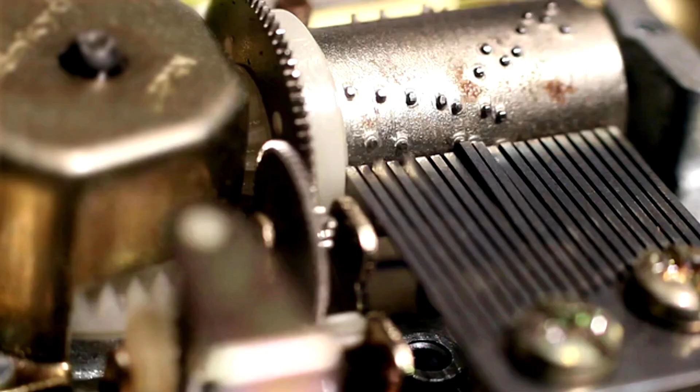Nowadays we are surrounded by lots of mechanical devices, and humans are rapidly enhancing these devices. Yet there is a question in our minds where this all began. This all began around the 12th century. The birth of a genius boy named Badi al-Zaman Abu al-Izz Ismail ibn al-Razzaz al-Jazari, in the house of a

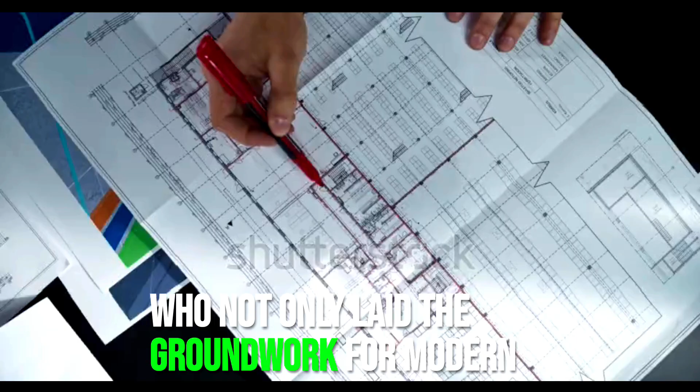humble craftsman. One of the most fascinating cases is that of the 13th century inventor-artist Ismail Al Jazari, who not only laid the groundwork for modern engineering, hydraulics, and robotics, but recorded his designs in a manner that would excite any enthusiast of Leonardo da Vinci's notebooks. In fact, it is often claimed they may have inspired Leonardo himself.

Badi al-Zaman Abu al-Izz Ismail ibn al-Razzaz al-Jazari was born in the area of Upper Mesopotamia in 1136. Sources state his exact location is unknown, but they speculate he could have been born in Jazirat ibn Umar, where he got the name Jazari from, or al-Jazira, which was used to denote Upper Mesopotamia. The only biographical information known about him is contained in his book of knowledge of ingenious mechanical devices.

Like his father before him, he served as chief engineer at the Artuklu Palace, the residence of the Mardin branch of the Artuqids, which ruled across Upper Mesopotamia as vassals of the Zengid dynasty of Mosul, and later of Ayyubid general Saladin. Little is known about his ethnic background, so he has been variously described as Arab, Kurdish, or Persian.

Al-Jazari was part of a tradition of artisans, and was thus more a practical engineer than an inventor, who appears to have been more interested in the craftsmanship necessary to construct the devices than in the technology which lay behind them, and his machines were usually assembled by trial and error rather than by theoretical calculation.

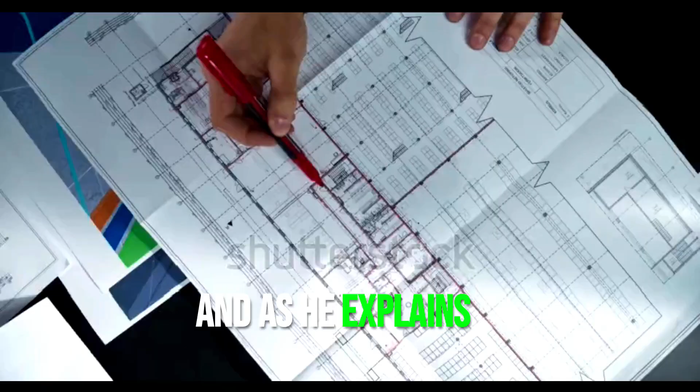His book of knowledge of ingenious mechanical devices appears to have been quite popular, as it appears in a large number of manuscript copies. And as he explains repeatedly, he only describes devices he has built himself. According to Mayer, the book's style resembles that of a modern do-it-yourself book.

Al-Jazari's masterpiece, The Book of Knowledge of Ingenious Mechanical Devices, 1206, contains detailed descriptions and illustrations of 50 mechanical devices. This work would influence engineering for centuries to come. Key features include precise technical drawings, step-by-step assembly instructions, practical applications, theoretical principles, automated control systems.

He created the first programmable humanoid robots, developed automated music-playing machines, designed sequential automation systems, water clocks and timekeeping, invented the elephant clock, combining Indian, Greek, Arabic, and Chinese engineering traditions, created water clocks with automated humanoid figures, developed mechanisms

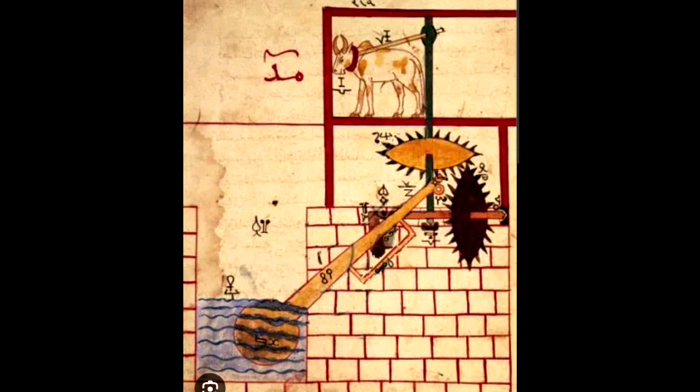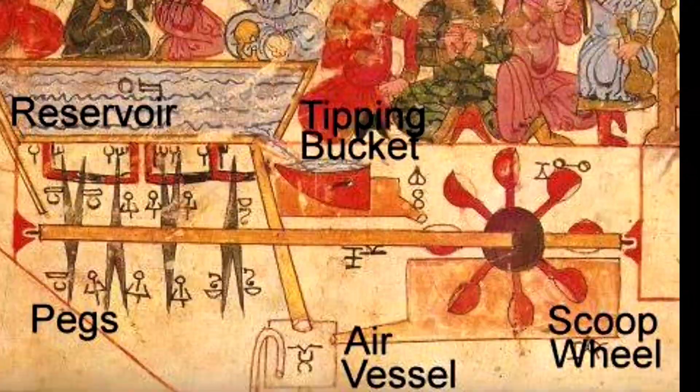for precise time measurement, designed advanced water-raising machines, created automatic fountains, invented mechanisms for controlling water flow, mechanical automata, designed automated peacocks that served drinks, created automated hand-washing devices, developed musical automata. Al-Jazari introduced several fundamental mechanical concepts.

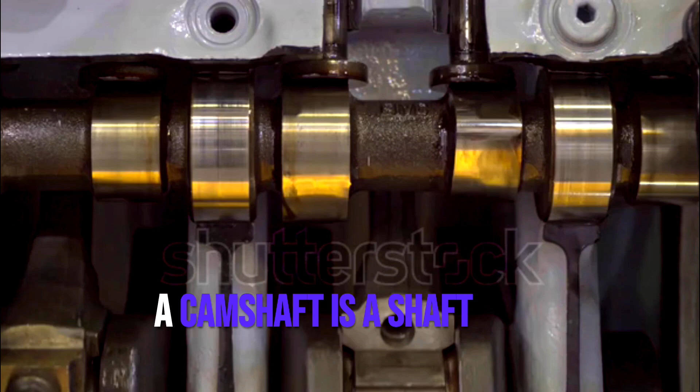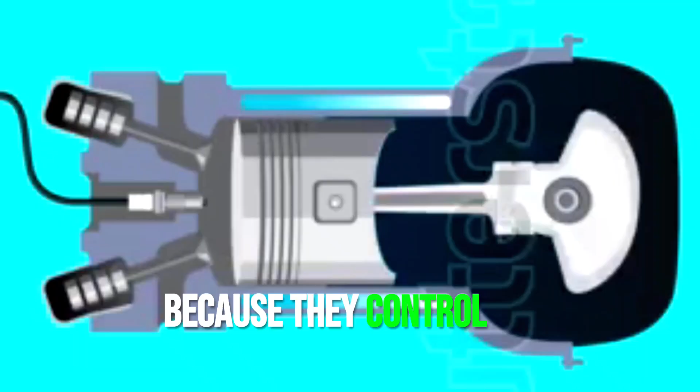1. Al-Jazari used camshafts in his automata, water clocks, and water-raising machines. Ismail Al Jazari described the camshaft in his 1206 book of Knowledge of Ingenious Mechanical Devices. A camshaft is a shaft with cams attached to it that controls the opening and closing of valves in an engine. Camshafts are critical to the operation of an engine because they control the amount of air-fuel mixture that enters the chamber and the exhaust gases that exit the chamber.

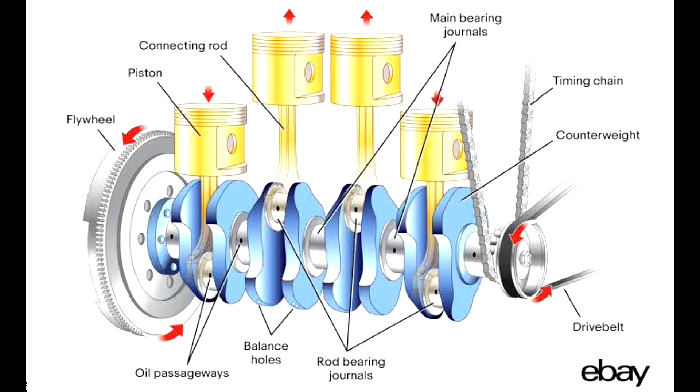Camshafts work in conjunction with the crankshaft, which moves the pistons. The shape of the cam and the speed of rotation control the rate at which the valves open and close. This is known as variable valve timing. 2. Crankshaft. Yes, Ismail Al Jazari invented the crankshaft in 1206. A crankshaft is a rotating shaft in an engine that converts the piston's up and down motion into rotational motion. This motion is necessary to turn the wheels and make the vehicle move.

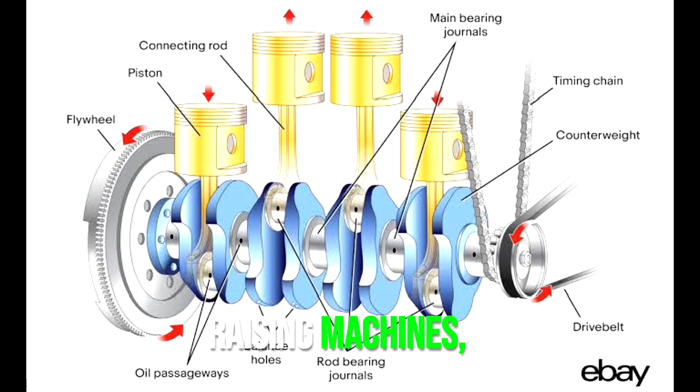Al-Jazari used the crankshaft in his water-raising machines, which incorporated a crank-connecting rod mechanism. His suction piston pump could lift 6 meters of water, which was more advanced than European suction pumps of the 15th century. 3. Segmental gear. Ismail Al Jazari, 1136–1206, is credited with inventing the segmented gear, which is a key component in mechanical engineering.

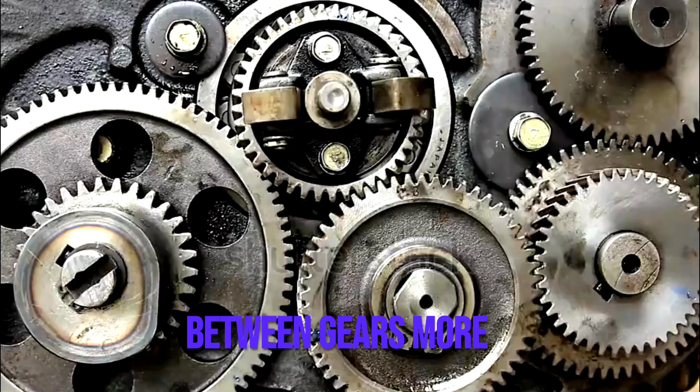Al-Jazari used segmented gears in his water-raising machines. He used segmented gears to transmit motion between gears more efficiently and flexibly. This led to more complex and sophisticated mechanical designs. Automated switching systems. Ismail Al Jazari, a 12th century Muslim inventor, created a variety of automated machines that included fountains that could be programmed to turn on and off.

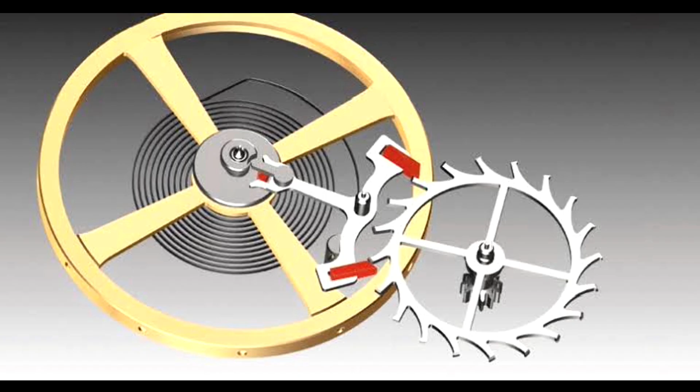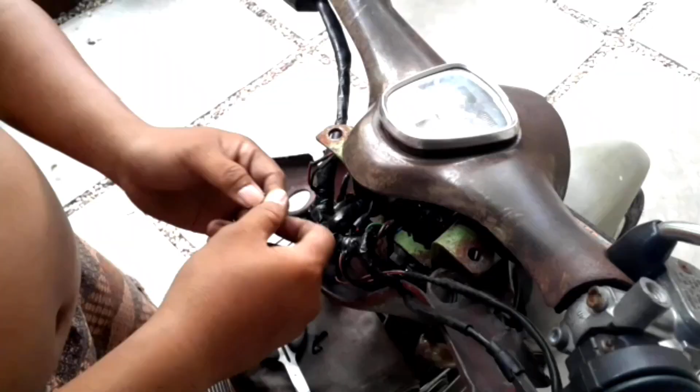Escapement mechanism. Ismail Al Jazari, 1136–1206, invented an escapement mechanism to control the speed of a rotating wheel. The escapement mechanism is used in a wheel-rotating machine. The mechanism controls the speed of the wheel by rapidly accelerating and decelerating the verge and crown wheel. The verge foliot and the crown wheel experience a drop and freely spin.

One of his most famous inventions, the elephant clock, showcased multiple innovations: automated timekeeping, multicultural design elements, complex gear mechanisms, water-powered operation, automated figurines, musical elements. Some of his devices were inspired by earlier devices, such as one of his monumental water clocks, which was based on that of a pseudo-Archimedes.

He also cites the influence of the Banu Musa brothers for his fountains, al-Saghani for the design of a candle clock, and Hibatullah ibn al-Hussein, died 1139, for musical automata. Al-Jazari goes on to describe the improvements he made to the work of his predecessors, and describes a number of devices, techniques, and components that are original innovations which do not appear in the works by his predecessors.

He invented around 100 mechanical instruments. Most of them were designed in such a way that they worked automatically, which means to run without human support.